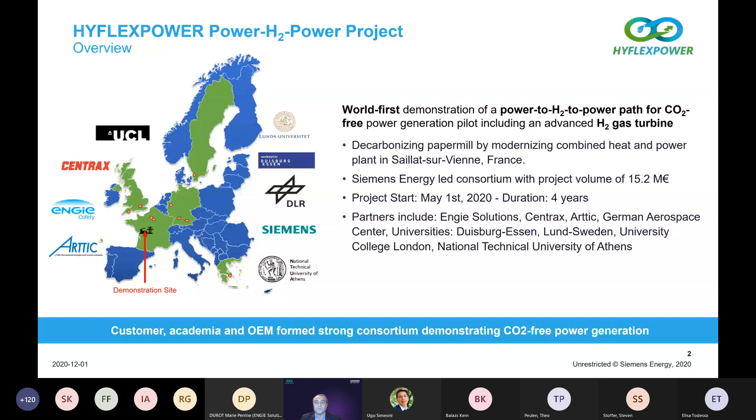Now to the consortium partners' responsibilities.

Siemens Energy is the coordinator and is responsible for supplying the PEM electrolyzer system for hydrogen production, and for developing and upgrading the existing SGT-400 gas turbine with high hydrogen capability up to 100% H2.

Engie Solutions is the operator of the plant and will build the hydrogen production, storage, and supply facility, including the hydrogen compressor, storage tanks, and the natural gas hydrogen mixing station.

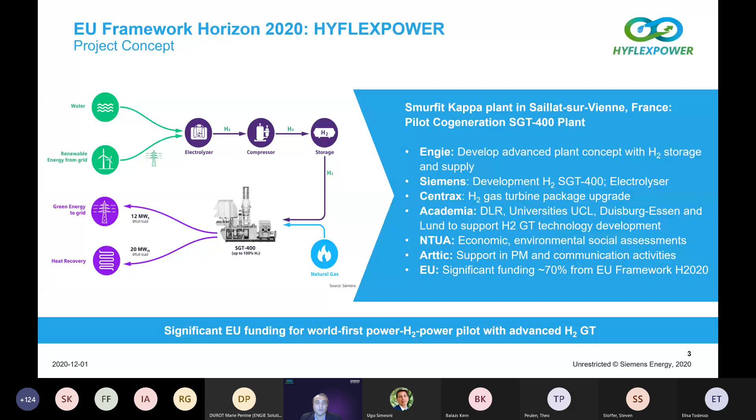The first milestone will be reached by the end of 2021, when the hydrogen production, storage, and supply facility will be installed. In 2022, the upgraded demonstrator gas turbine will be installed, and the new components on site will be commissioned.

The second important milestone will then be reached in the fall of 2022, when the advanced plant concept will be demonstrated with natural gas hydrogen mixtures of higher than 10% hydrogen.

The main milestone and ultimate goal of the demo is to demonstrate, in the fall of 2023, the advanced plant concept up to 100% hydrogen for CO2-free energy production from stored excess renewable energy.

So with all of this, the expected results and their impacts of the HYFLEXPOWER project are as follows. When completed in 2024, HYFLEXPOWER will be the world's first demonstration of an industrial scale power-to-hydrogen-to-power solution with an advanced hydrogen turbine.

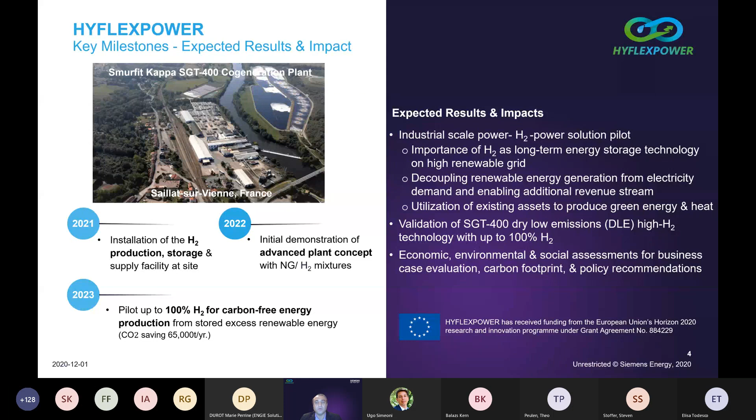With this, I would like to conclude my presentation and hand back over to Ugo. Thank you very much for your attention.

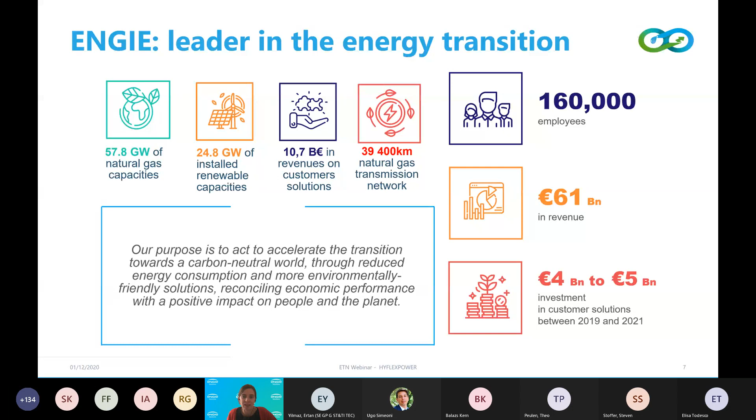Engie Solutions for Industry represents 20,000 employees and 3.8 billion in revenues. We have 3 main purposes for our clients: first, providing low carbon resources and energies; then, to optimize energy consumption; and third, to deliver Industry 4.0 solutions. Therefore, hydrogen is a full component of this strategy.

Next slide please. In particular, green hydrogen, which is, in our view, a very powerful instrument to decarbonize industry. And as you know, green hydrogen, especially when directly connected to renewable electricity, has no impact on greenhouse gas emissions, while each kilogram of grey hydrogen produces 10 kilograms of CO2 equivalent.

This is why Engie has been and still is a world pioneer in green hydrogen. For example, we've been a founding member of the Hydrogen Council, which is structuring the value chain and all the players in this field.

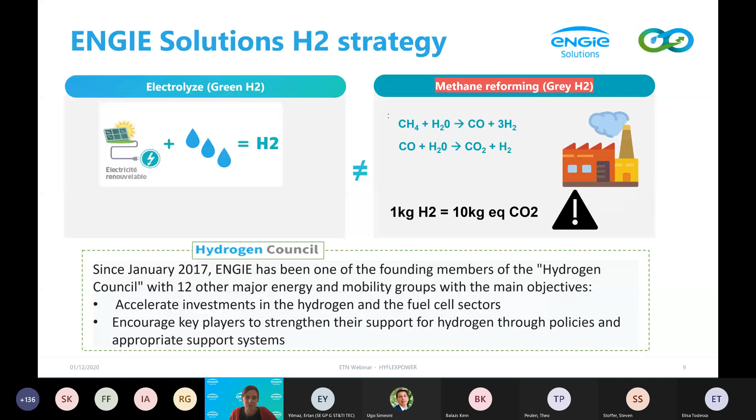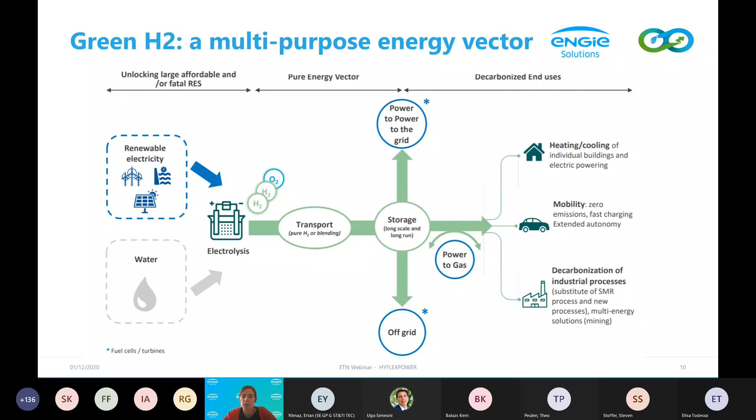Next slide please. Our vision is to encourage the development of hydrogen for diverse final usage, in particular grid services like storage of renewable electricity during peak production, but also off-grid services, for example providing energy in remote locations, and final usage for industry, mobility, and buildings.

Next slide please. To materialize this vision, we have developed turnkey offers that aim at providing green hydrogen to our clients. For example, we are able to design, invest in, build, operate, and maintain renewable H2 plants that provide green hydrogen to our industrial clients at a specified quantity and quality. Similarly, we have developed a turnkey, global offer on refueling stations for hydrogen mobility. Combining these two, industry and mobility, we are actively taking part in the development of hydrogen territorial hubs in various parts of France as well as other European countries.

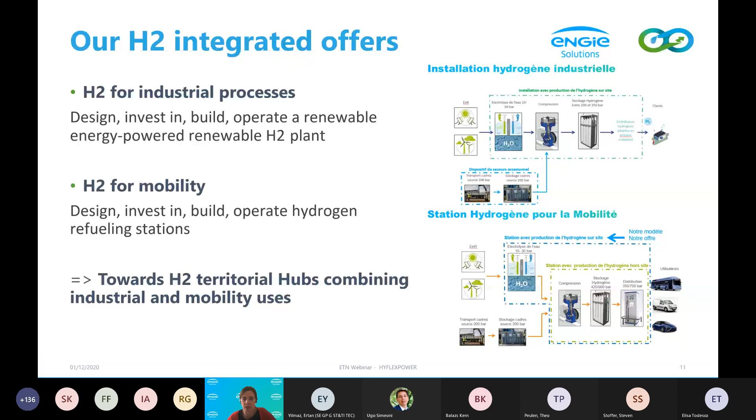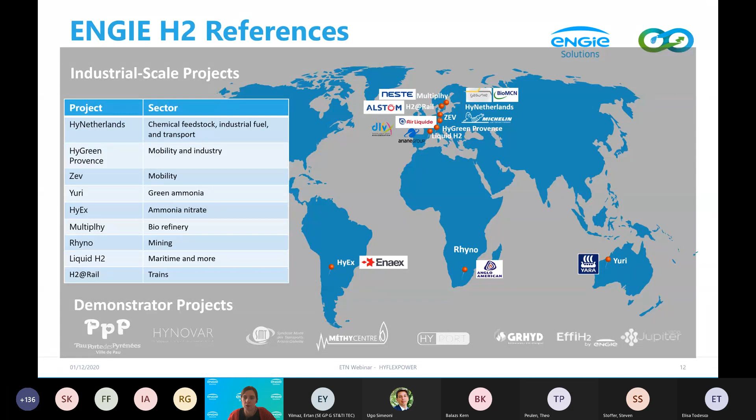Next slide. This is a focus on France, where you can see we already have a mix of mobility and industry references in green hydrogen, and this concept of territorial hubs that are popping up in different parts of the map.

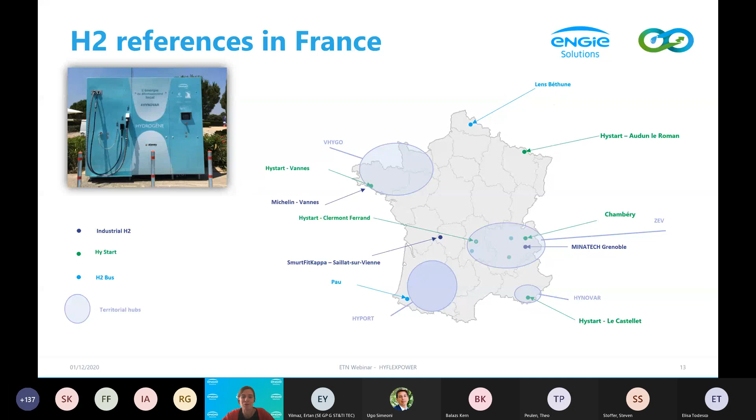Southwest of France, you will find the city of Saillat-sur-Vienne, where you will find the demonstrator of HYFLEXPOWER. So beyond this mature project for mobility and industrial use, Engie is investigating a number of innovation projects to prepare for the future of hydrogen.

In this regard, HYFLEXPOWER is a key project in our roadmap for industry. It allows us to explore technical solutions using hydrogen as a vector to replace or act in combination with natural gas for combined heat and power production at an industrial facility.

Alongside this project, we are also working on testing the substitution of natural gas by hydrogen in high temperature furnaces, like glass, for example, in our semi-industrial facility near Paris, in our R&D department. And we are also looking at liquefaction technology for future mobility uses, like in the marine sector.

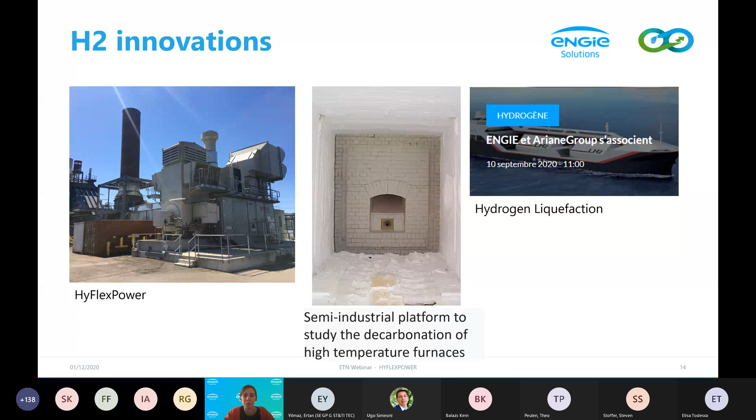Next, the last slide. As I said, HYFLEXPOWER is a key component of our roadmap for hydrogen for industrial uses. The project is located at Smurfit Kappa's site, which is a long-term partner of Engie Solutions, as we are responsible for operating the site's power plant.

In the project, as was said by Siemens, we are responsible for installing the full hydrogen value chain up to the natural gas and hydrogen mixture for injection into the turbine. The engineering will be carried out by our engineering subsidiary ERAS, and also with our R&D department. Then the commissioning and testing will be carried out in 2022 and 2023.

So this is it. As you see, HYFLEXPOWER is really a key project in our hydrogen roadmap, and we look forward to the results of this important project.

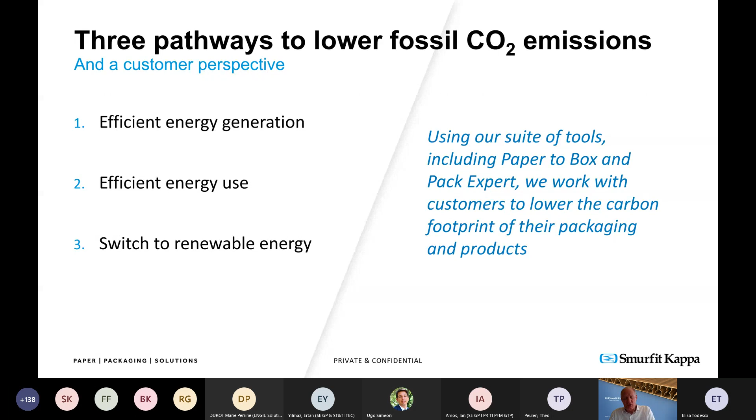So that brings us to the question: where does hydrogen fit in for Smurfit Kappa? Well, about 80% or a little over of our fossil emissions occurs in our paper mills. We have two types of mills. We have kraftliner mills, where paper is produced on the basis of wood. These mills are basically zero fossil CO2, they are almost CO2 neutral.

Our challenge is in the recycled paper mills. Those are the mills where we produce paper from recovered fibers. These depend very much on fossil fuels, and we can do a lot by efficient energy generation and usage, but not enough to reach net zero. So that's where non-fossil alternatives come into place, but all of these have issues. For example, biomass has an issue of availability, geothermal is not everywhere possible, and green electricity has issues with grid capacity, connectivity, and availability.

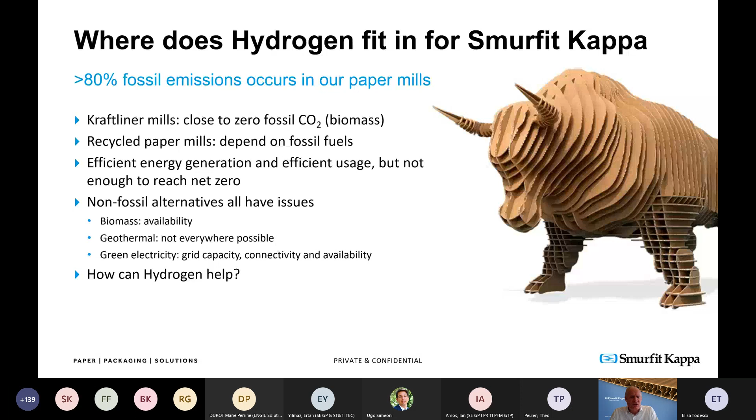So that raises the question: how can hydrogen help for us? Well, as a starter, to manage your expectations, if we can use green electricity directly, that is preferred for us over the use of hydrogen. We should only use green hydrogen when green electricity options are exhausted.

And it occurs that in the current state of affairs of hydrogen, for the paper industry, hydrogen applications seem limited. It is not the most efficient application for the low temperature heat, meaning between 150 and 200 degrees Celsius, as used in our industry. Green electricity is much preferred as it eliminates the conversion losses from electricity to hydrogen.

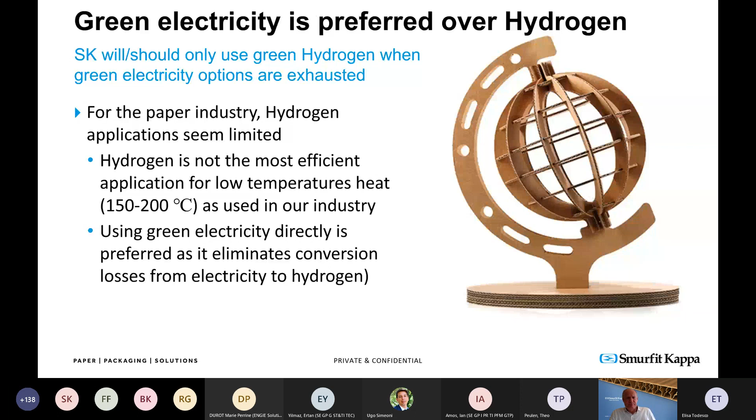Let me compare hydrogen production on-site or off-site. Via CHP we would do that on-site, or via a power plant, the grid. If we take the hydrogen from the grid, the efficiency of the electrolysis is 70%. So that is already a first indication that only excess green electricity should be used to produce hydrogen if possible.

If we then convert the hydrogen at the power plant, that has an efficiency of 45%, because 70% times the 65% efficiency at the power plant gives us 45% efficiency, whereas if we do that on-site with a CHP, we have an efficiency of 60%.

I think it's very illustrative to say that if we would use one hour of efficient on-site hydrogen conversion at a medium-sized paper mill, which Saillat is, and convert that into electricity, that saves the annual electricity use of 8 households compared to conversion at the power plant. So that's just one hour of efficient use of hydrogen.

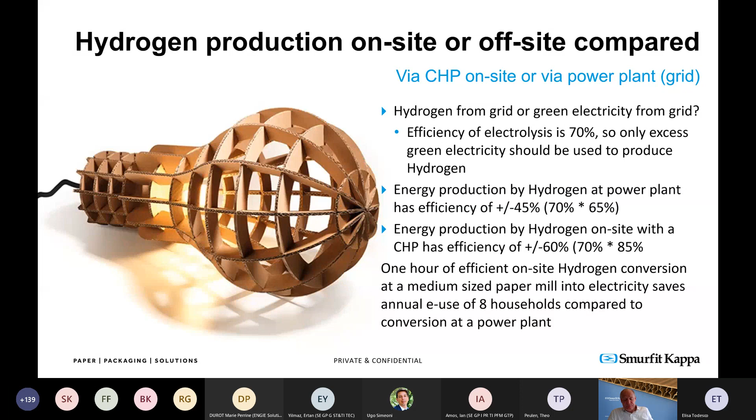That brings me to my last slide, and that is that there are, of course, many questions still unanswered for the use of hydrogen for us. This is why we are also so much interested to participate in the project.

One of the questions is the conversion cost of turbines and boilers. Is there extra maintenance needed? Are there higher NOx emissions, and will that impact electricity production? There are more such questions, so these are all unanswered, and we hope to answer them during the project.

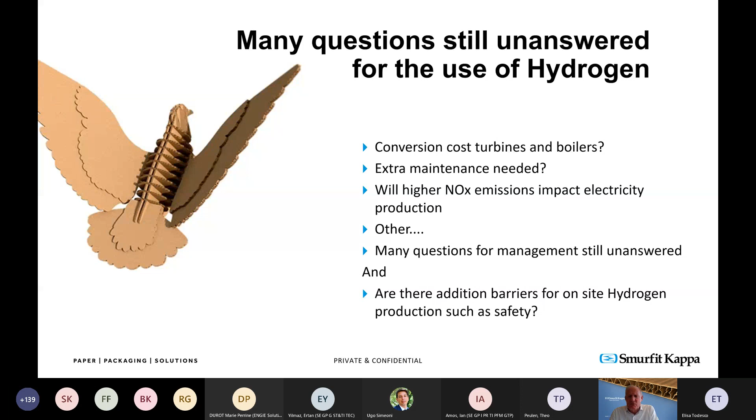And then, of course, as a very last one: are there additional barriers for on-site hydrogen use in the area of safety? With that, I would like to thank you for your attention and conclude my presentation.

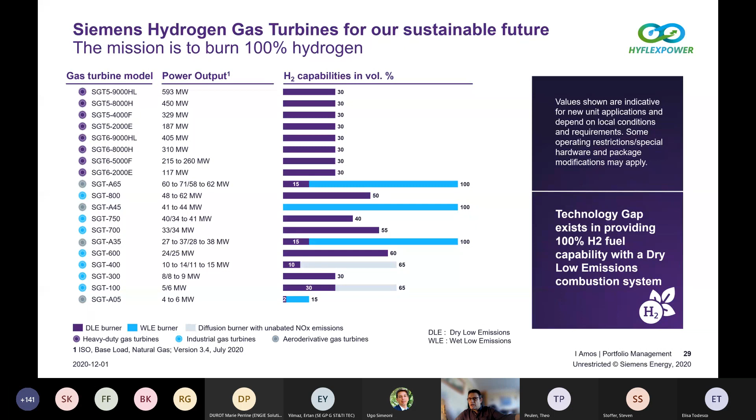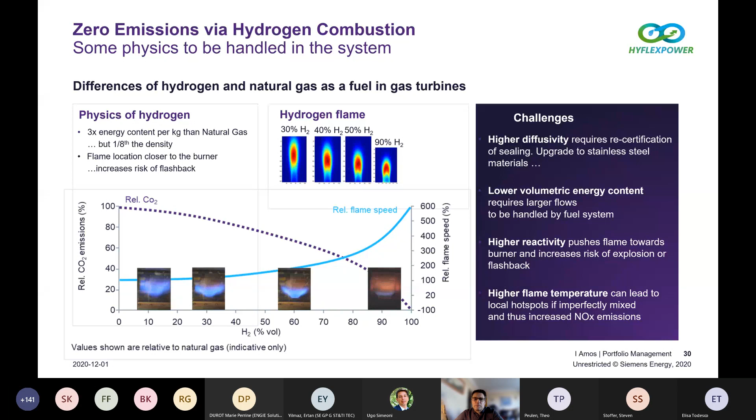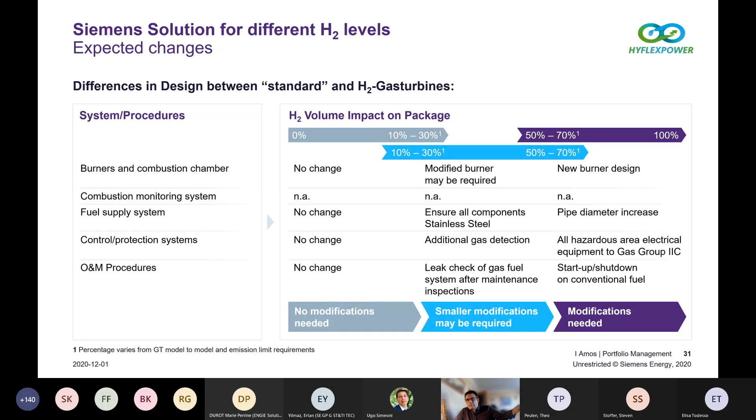We are at the moment in relatively early stages of the project. We're developing the basic combustion technology, aided by extensive rig testing, and providing definitions of the various performance parameters to the other partners in the programme for design of the rest of the installation and for evaluations. We're looking forward to this programme continuing and being able to update you on further developments in the future. Thank you very much for your attention.

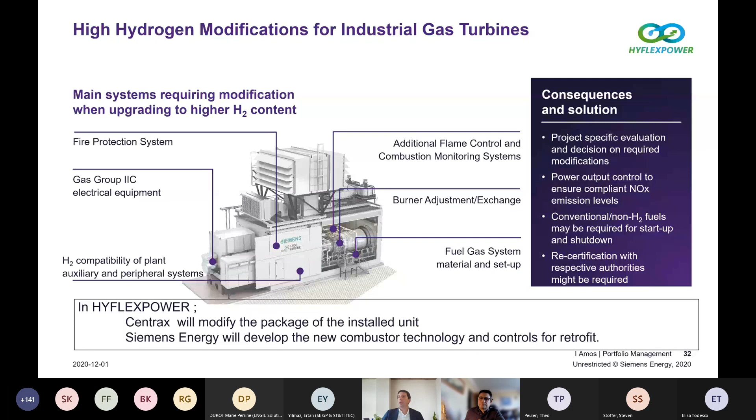Thanks a lot, Ian. I would like to check whether there are questions. Yes, some questions are on the fleet, whether the A65 and A45 fabrication was stopped or it's still ongoing.

Well, we've shown on the first chart that there is capability of those products with hydrogen at the moment, predominantly using water injection to control the emissions. So yeah, we intend to develop a hydrogen capability across the whole of the fleet, and certainly the work we're doing on HYFLEXPOWER is not going to be restricted to the SGT 400.

We'll be using that technology and rolling it out across the whole portfolio. Okay, thank you. I think other similar questions were answered during your presentation, but what I would like you to answer is, what is the current TRL level of your 100% hydrogen turbine, and what will be the TRL target at the end of the project?

The technology readiness level, I don't know, Ertan, are you closer to those definitions? TRL7 is demonstrated. Yeah, at the end of the project, it will be TRL7 demonstration on an engine in the plant, and currently we are developing our technology for dry low emissions technology, with the ultimate goal to have it ready for implementation by 2023, for the summer campaign of 2023.

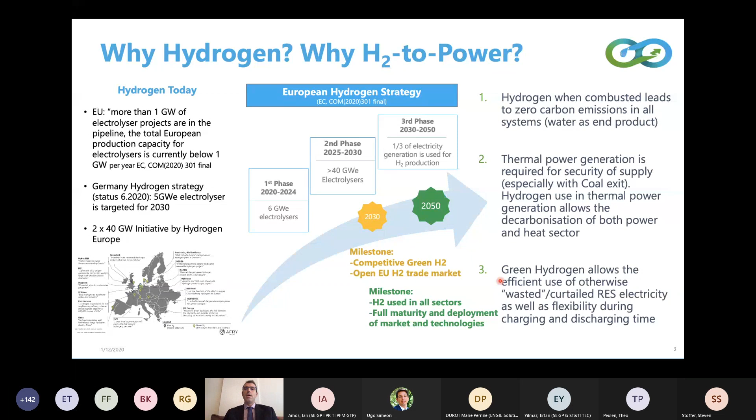Hydrogen, when combusted, as we know, leads to zero emissions in all systems. We have the possibility, now we are discussing the coal phase down, so hydrogen is a fuel that allows us to use wasted energy and to curtail the surplus of energy.

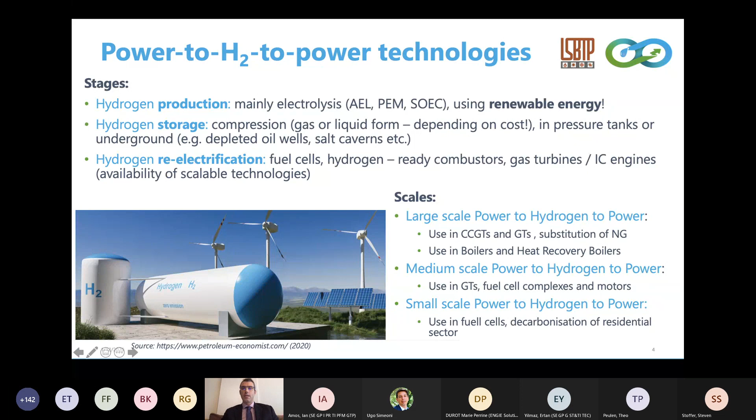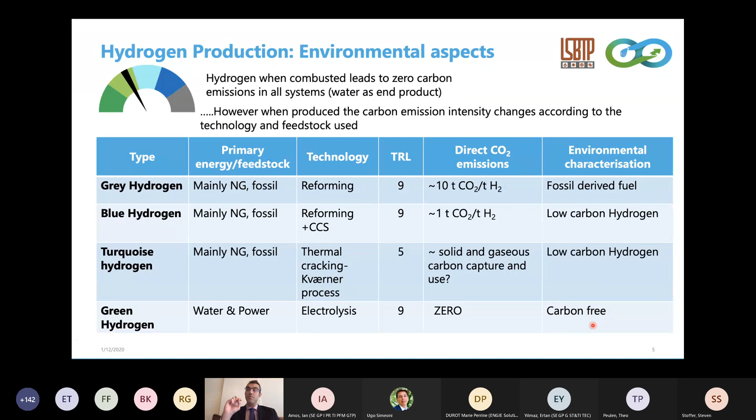As you can see here, the TRLs, and we see here the direct emissions. The direct emissions of gray hydrogen are quite high, as was mentioned before by Marie. So our project is really aiming at zero direct emissions going through electrolysis, and this is a carbon-free technology in terms of emissions in the power plant.

So in our project, as was also said before, we have the first stage, which is the power to hydrogen part, from renewable energy sources, mainly from wind turbines, but also thinking of other renewable energy sources. We are producing the hydrogen, which is being compressed, stored, and then combusted in the gas turbine that was mentioned before, producing electricity and heating.

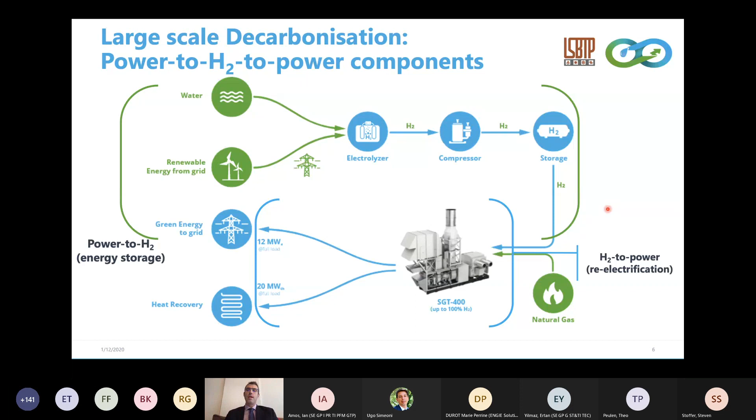This is also very important because we are discussing cogeneration, not only electricity generation. So there is also a very important issue dealing with covering the heat demands. Our aim is then to reduce the natural gas portion and then to eliminate it.

So I end up my presentation here. I would like to say that if we only assess the foreground emissions, we fail to see the largest part of emissions that occur during the entire life cycle of the technology. That means we need to look not only at the top of this iceberg, but also at the entire life cycle of the technology.

And we have to see from component, construction, transport, supply chain configurations, and end of life - for example, dismounting, recycling, waste, reuse, disposal.

All these issues that are part of the circular economy we're discussing today, combined with each technology nowadays, are very important to be discussed in this project. This is the role of the National Technical University of Athens, because we need to see how all these components are linked with their life cycle, environmentally. We will have a reference case, and we need to see how much better we are in terms of environmental performance compared to that reference case.

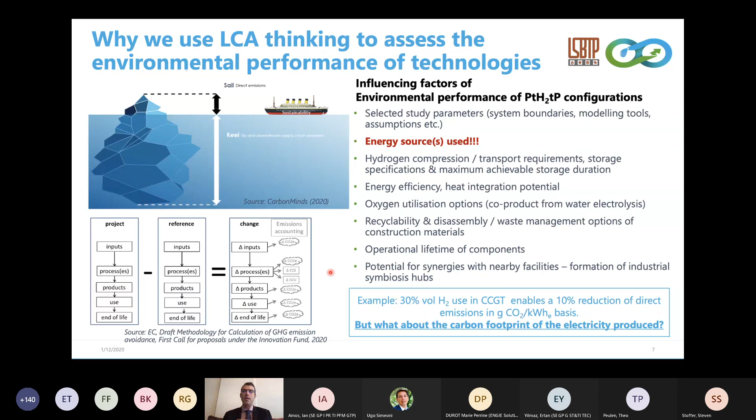As an example, if we have 30% hydrogen in a combined cycle gas turbine, that means we have a 10% reduction of direct emissions in terms of grams of CO2 per kilowatt hour electric basis. But what about the carbon footprint of the electricity produced? That is the question we are asked to answer in this project, and we are very happy to discuss these issues with all the partners and with the whole energy community. Thank you very much for your attention.

Thanks a lot, Sotirios. We already have some questions in the chat. The first one is: what is the rated size of the electrolyzer? I think this is a question for Siemens.

The electrolyzer will be utilized to generate hydrogen, store up to 1 ton of hydrogen, and supply it to the gas turbine at the needed time. At this point, the size of it is going to be on the order of 1.25 megawatts, and we will provide the details at a later stage, preferentially during a demonstration in 2022.